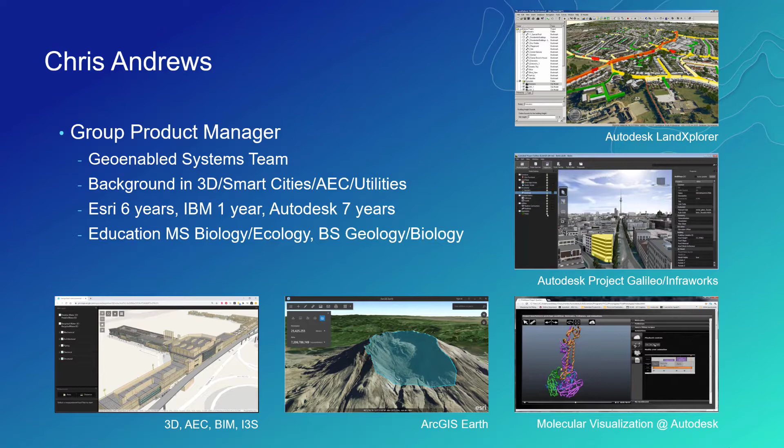Just a quick overview of my background. I've been at Esri about 6 years. Before that, I was at IBM and then Autodesk, and then previously in the enterprise integration consulting market. My background is primarily in 3D, smart cities, AEC, and utilities, but my education was actually in biology and geology. I've been doing GIS since university, and so I've been in the community for quite a while.

About 6 years ago, Esri introduced a new specification for streaming very large 3D datasets called I3S, and since then it's been moved through OGC as a community standard, and it is designed to be cloud, web, and mobile friendly. It is completely open. Anybody can use it without any remuneration for Esri, and it supports all kinds of geospatial workflows, including BIM, custom coordinate systems, and we're adding to it constantly with feedback from partners and customers.

I3S is a key vehicle for us to be able to enable 3D workflows in urban planning, AEC, and other domains. Our apps cover a range of experiences from field applications to rich desktop applications, web, and then some tailored experiences for specific workflows such as urban planning. I won't go into that too much more, but I'll simply say that what we're seeing is a wide application of our apps and experiences across use cases in smart cities, urban planning, digital twins, and AEC markets.

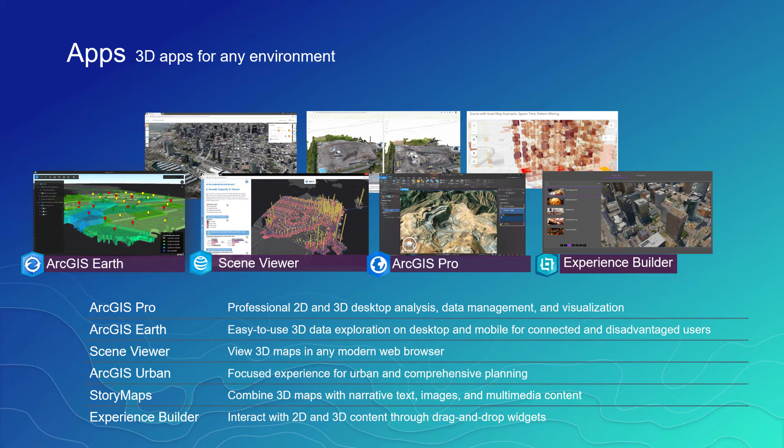Of course, we're looking ahead as well. One of the more exciting things that's released recently is the ArcGIS Maps SDK for game engines that's currently in beta. We've released this for both Unity and Unreal, and we're looking for lots of feedback from our community on how they want to use it.

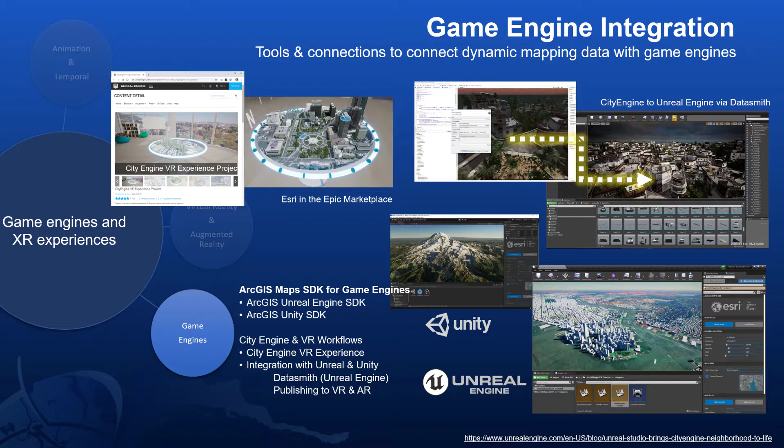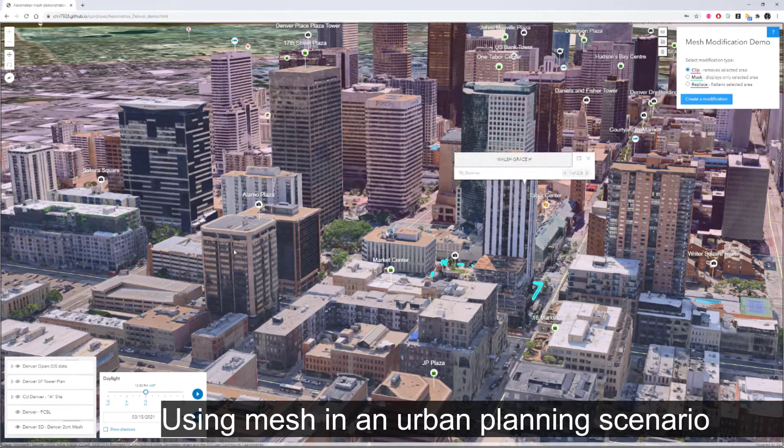Let's take a quick look at using mesh in an urban planning scenario. So here I have the fantastic 2 cm Denver mesh that Aerometrex provided. I've draped onto that parcels and neighborhoods and streets, and you can see it in this experience on the web. I can just click right on that mesh and see some of that data from the planimetrics.

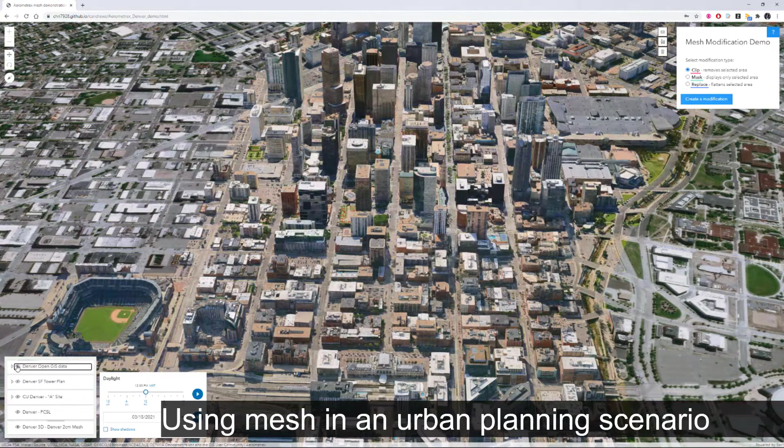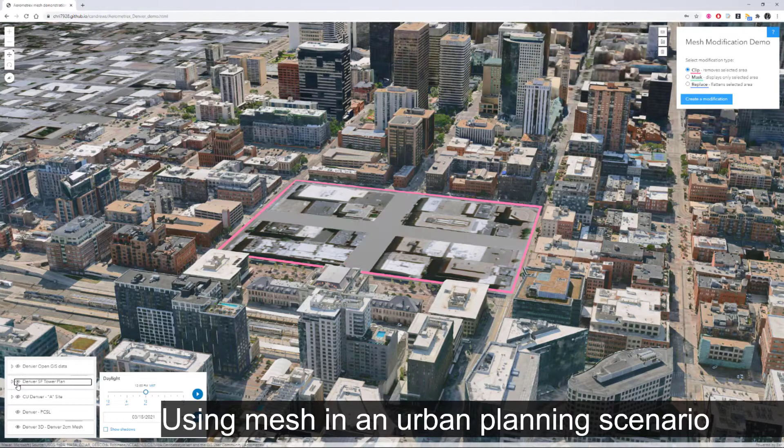So let's pretend that a large donor has given CU Denver a site right in the middle of downtown. The first thing that I might want to do is actually just use that downtown area for context. And so I'm going to clip out part of the downtown right here in my web experience. And then I'm going to superimpose on that a couple different planning scenarios, the first one being something that looks an awful lot like the Salesforce Tower in downtown San Francisco.

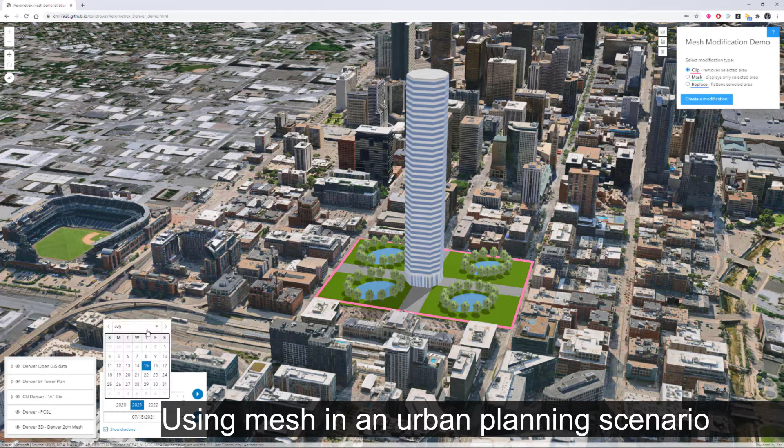What I might need to do though is demonstrate to the city, for example, that this tower isn't going to cast shadow over the ballpark or other areas where I'm not allowed to. In March and July, it looks like it's probably okay, but let's take a look at December. And what you'll see here is that December actually crosses well over the ballpark. And so maybe I've just violated a code and I can't actually build the tower this high.

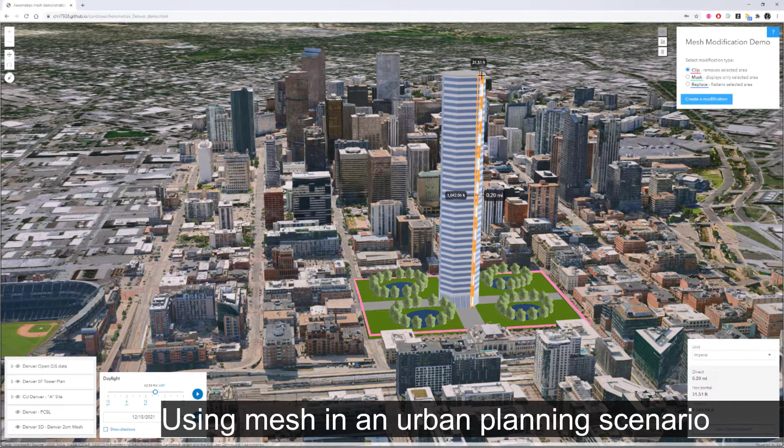Well, actually, let's see how high it is in the first place. So now I'm able to use a simple measurement tool here again in the web, and I'm able to show you that the tower is about 1,042 feet high, so it's actually 30 feet less than the tower in downtown San Francisco, but it still does cast that shadow a full 0.20 mile away, which is pretty incredible.

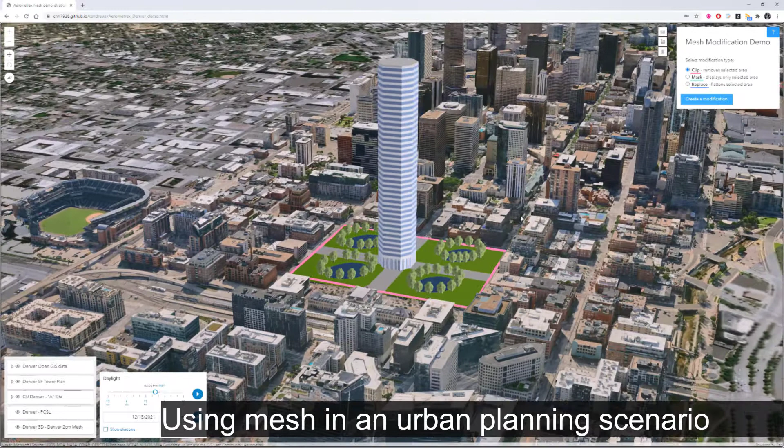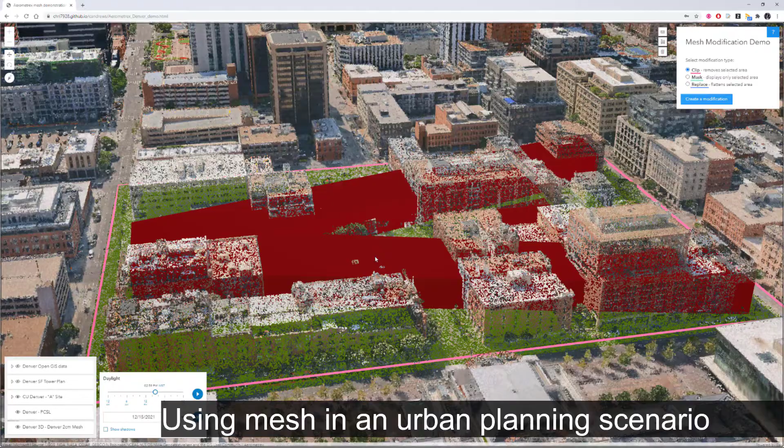And so maybe that tower isn't going to cut it, but maybe this fantastic reality capture company Aerometrex has decided to donate for a new building for CU Denver. Here you can see the shape of the building that they might like, but of course the city wants to see how that is going to look compared to the original buildings that were on the site. And so for that, I'm able to superimpose the photogrammetrically derived point clouds that Aerometrex also lent me, and you can see where their building was in the context of that city.

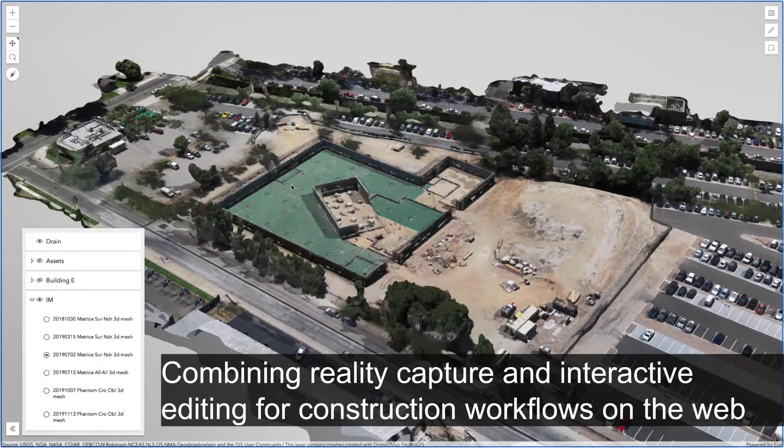What we're going to take a look at is a quick use of reality mesh on the Building E site at the Esri campus, along with some BIM data and some other experiences that we're able to create. So you just saw me flash through a couple different versions of a construction site in progress. But now let's say somebody in the construction team wants to actually take a look at the in-process as-built in comparison with the BIM data that has been the design for that site.

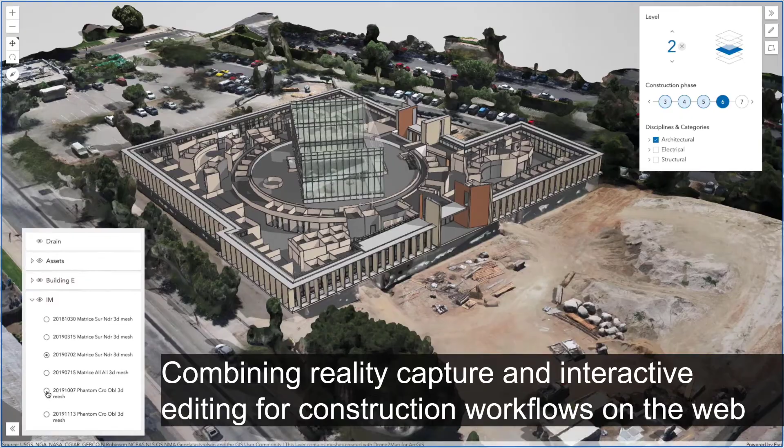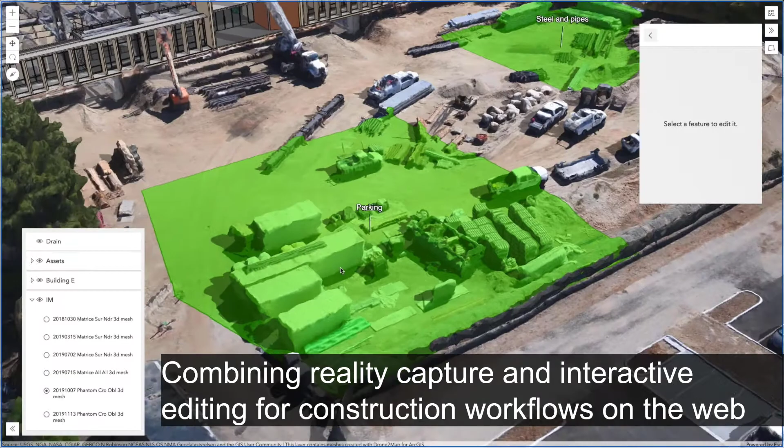So I have a Revit model that I've brought in and streamed in I3S format right into my web experience. I can superimpose it right there with my reality mesh. And then I can start to use the two together to do things like, say, draw out zones. In construction planning, there's a lot of need to identify different areas on a site that mean parking or materials or safety grouping areas.

I'm also able to do things such as move around 3D assets in this scene. So if I need to, say, set up a staging scenario where I actually want to move that truck to where it's supposed to be, I can move that around right there in the scene. And then I can even do things like, say, show simple excavations.

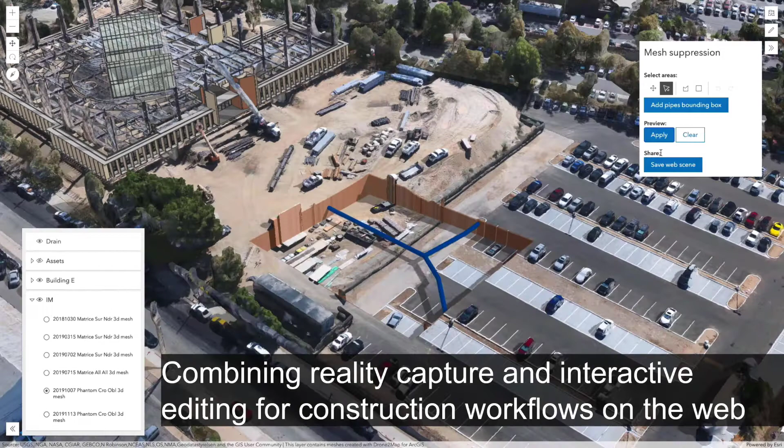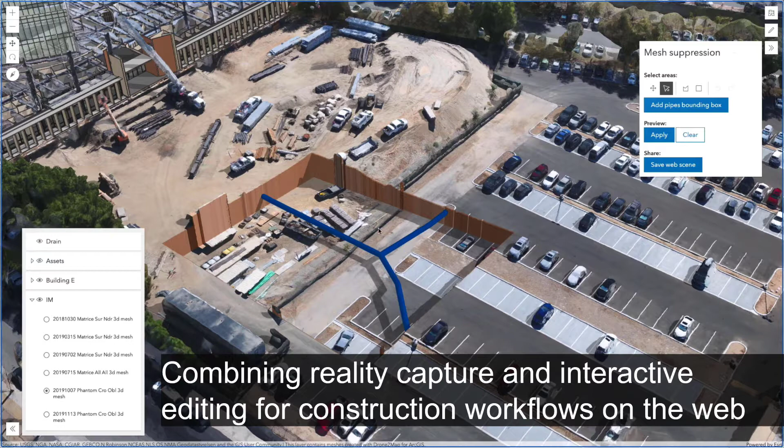Here I've dropped down in elevation a section of this reality mesh, and you can see where the underground pipes are going to be. And then I have full access to other capability in this type of environment. In this case, I'm just going to show I can do some simple manipulation of the pipes right here against the context of the reality mesh.

So there's lots of exciting things that we're able to do these days in GIS with reality capture data, traditional GIS data, and BIM data, and bringing it all together in experiences for our users to work with.